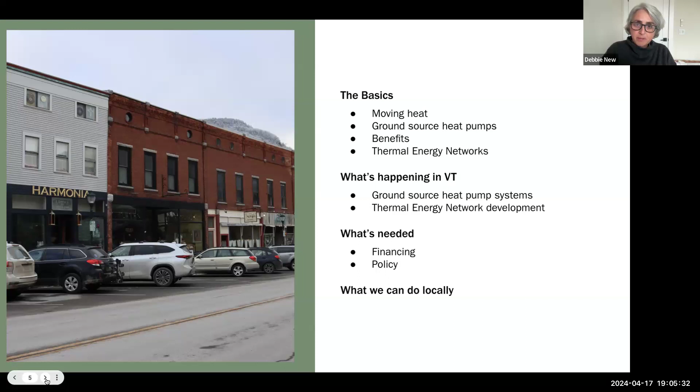I'm sure I don't need to tell you that in Vermont especially, heat is a precious resource. We spend a lot of time, energy, and money trying to make heat, move heat, and save as much heat as we can. We're using a lot of fossil fuels in order to create our heat. We're having to rely on that a lot, which means we're spending a lot, we're importing that fuel, and that means our energy dollars are going out of our communities and out of our state.

But there is a way to maximize heat that we already have here, and the way we do that is with ground source heat pumps. You may already be familiar with an air source heat pump, and you may already know about a ground source heat pump, sometimes also called a water source heat pump. These are much like air source heat pumps in that they compress or reject temperature in order to heat and cool inside spaces. But ground source heat pumps use water instead of air, and they also use more moderate temperatures, which is important in a couple ways we'll get into.

So if you have a ground source heat pump in your home, for example, you can see the gray box in the basement is the heat pump. It looks a lot like a boiler. That heat pump pulls temperature in from outside the building, compresses it, and delivers it through ducts or some other form through the building to make you warm in the winter, and also can remove the heat and get that out of the building to keep you more comfortable.

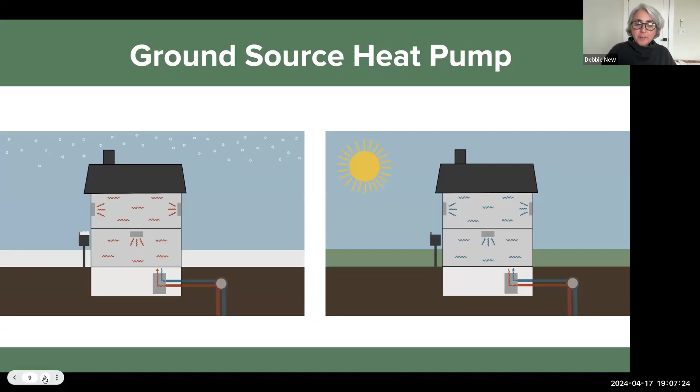In the summer, the process reverses. So the heat pump removes heat from the building, sending it outside into the ground, and that allows the space inside to become cooler, bringing in that coolness to keep you comfortable. Now, this energy comes mainly from the sun, and in this case, from underground, and a lot of people refer to this as geothermal heating and cooling - which doesn't mean it's about the hot rocks and what you find in Iceland or geysers or that kind of thing coming up from the Earth's core.

This is about the energy of the sun being absorbed by the Earth that holds it, acting like a solar battery. So we can drill into the Earth and create a borehole like this with vertical pipes filled with water at about the depth of a water well, where the Earth's temperature in Vermont is pretty much a constant 50 degrees - that's the more moderate temperature I was talking about earlier. So that's how the energy gets into the house through the vertical pipe, horizontal pipe, to the ground source heat pump.

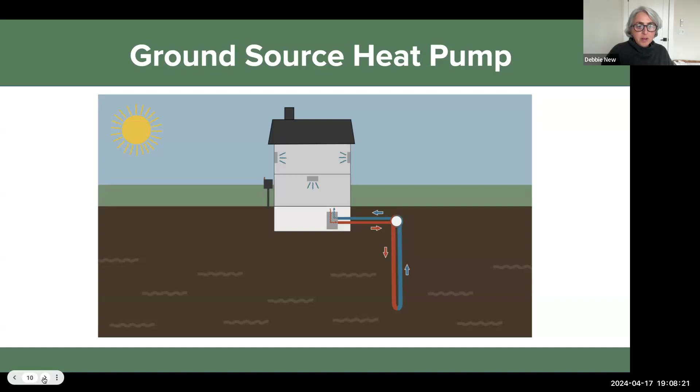So this system works really well for an individual, a home, or a municipal building, a larger building, particularly because they are so low maintenance and efficient. They can actually lower costs for energy use in our municipal buildings and other large individual buildings.

They also work really well when they're networked together. The important thing here is that we can start small by just linking a couple of buildings and then expand it over time across a neighborhood, across our community, to reach different buildings and become a network. This makes the system even more efficient because buildings need different heating and cooling at different times, so instead of wasting that energy, we can share it and balance it between buildings.

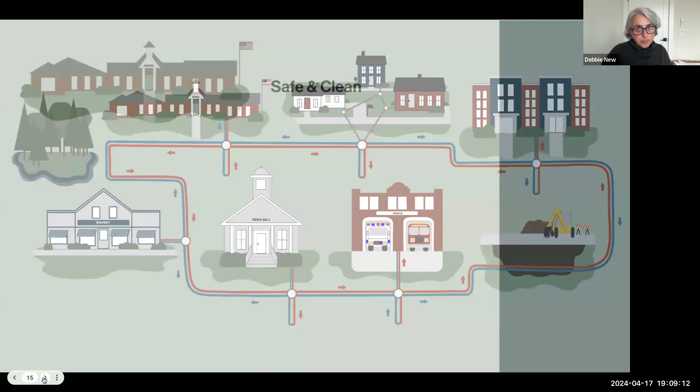I just want to talk through some of the benefits of these systems pretty quickly, and I bet you can guess at many of them. For me, one of the important ones is that it's safe and clean because it's mainly water inside the pipes instead of fossil fuels, which means there's no risk of explosions or toxic leaks and no emissions. They're also affordable and reliable because once installed, customer bills can be low and predictable year-round. They're healthy because nothing is burned to create the heat, so indoor air is safer to breathe. They're flexible, which I think is a really important component in terms of our Vermont landscape and the local character of our communities.

These systems are underground and inside buildings, so they're not visible, they're not an aesthetic problem, and our communities can look exactly the way we want them to.

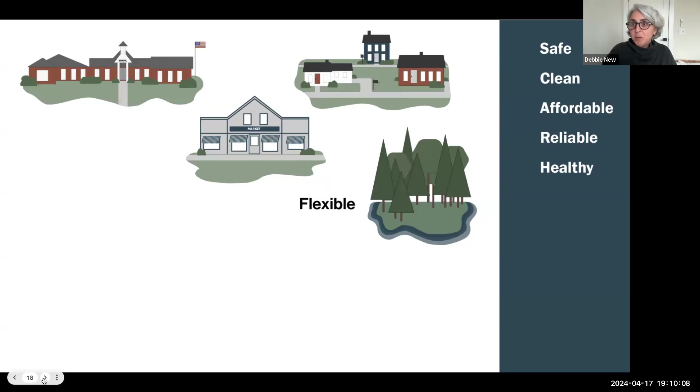They're also resilient and secure because the pipes are underground and the components are inside. They're less vulnerable to disruption and extreme weather events, particularly in Vermont where flooding is much more of an issue.

They can also be equitable because they're not about one house or one building at a time being able to access and afford the system. They're a community scale system that people can tap into, but that is provided across a neighborhood, so it can be available to a lot of people and a lot of buildings at once.

They can also be part of a just transition because oil and propane and gas workers are essentially plumbers and pipe fitters, and those are the skills that are needed to install and maintain this equipment. So it would take very little training for our Vermont oil and propane delivery companies to retrain their workers and move into this business instead of going out of business.

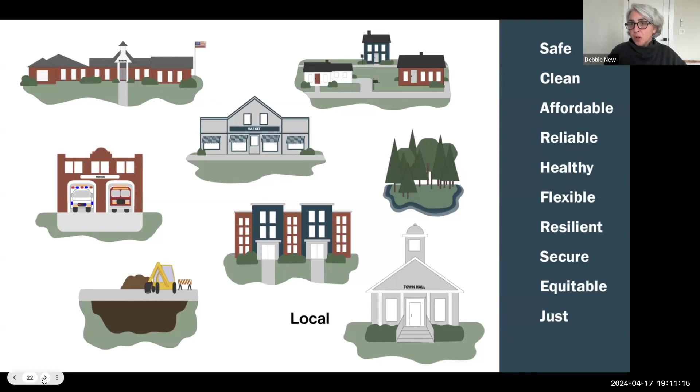The other really important thing is that this is local. In other words, the heat is right here. We're using it here. We're investing in our own communities, and we can control these systems locally, whether it's a municipality or a different kind of ownership model. So that's a pretty long list of benefits.

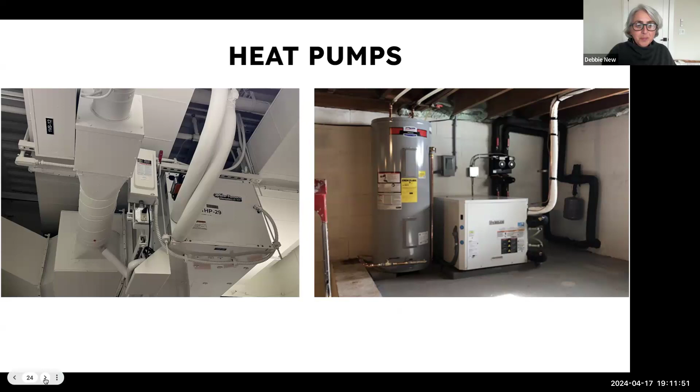So what does this look like? Well, these are a couple different heat pumps. On the left, that's a heat pump unit that is up in the ceiling in a more industrial setting in Burlington at Hula on Lake Champlain. And on the right, a heat pump in an individual building or home looks a lot like a furnace. It's that box. There are also the pipes, plastic pipes of varying diameters, and whether they're narrow or larger, it all goes underground and out of sight.

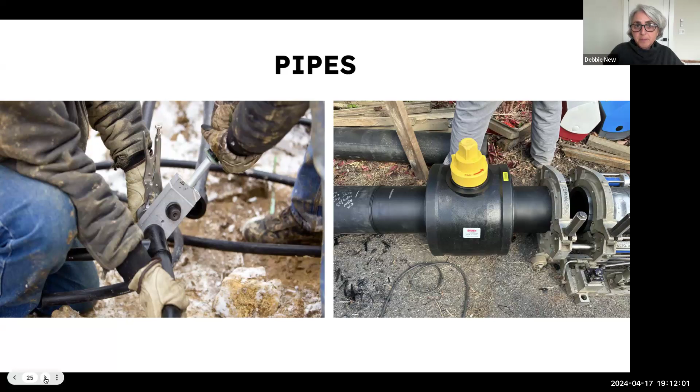So one place this technology is already working in Vermont is in Burlington at Champlain College. And if you think of a college campus kind of like a community where there are different buildings that serve different purposes, used at different times, you can imagine how a network would be very efficient.

At Champlain College, they have new construction where they've installed this. They also have historic buildings that have been retrofit to be dorms and offices that are also using ground source heat pumps. And they've connected the buildings via horizontal pipes underground, kind of like a gas pipe would connect buildings. And those buildings at Champlain College are sharing heating and cooling, and they're working on expanding the system to cover their whole campus.

As I mentioned before, Hula on Lake Champlain is another Burlington example of this technology working. They also have solar and other technologies they've integrated into the system. That is working really well, and it hasn't been operating as long as Champlain, but it is still working very well at Hula.

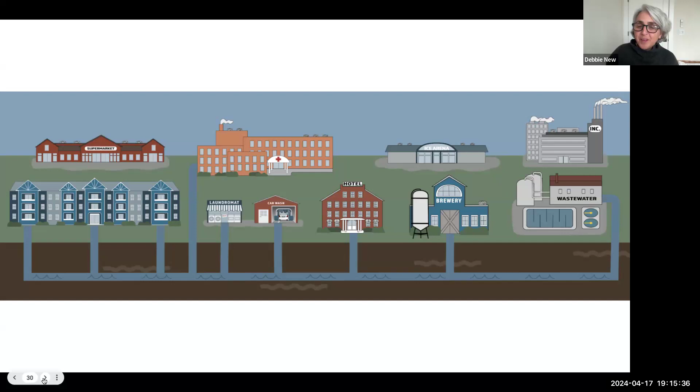You can also reject heat into that wastewater, and it gets carried away so your buildings can be cooled in the summer. So wastewater is one way we can access temperatures that we are already creating and currently discarding. The other way we can access temperature is through waste heat.

If you think about a supermarket or an ice arena, and even your refrigerator at home, to cool things down, we have to take heat out of them. So whether it's your refrigerator, a grocery store, or an ice arena, in order to provide that refrigeration, heat has to be pulled out of the building. Right now, most of that is being vented through cooling towers or fans you can see on top of these buildings. It's not just refrigeration, but hospitals, hotels, breweries.

There's waste heat coming out of a lot of our big buildings that we can capture and send back into buildings through water and pipes.

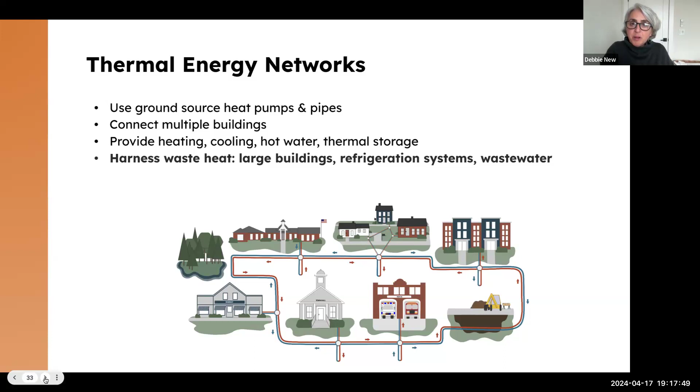So thermal energy networks, to sum up, use ground source heat pumps and pipes to connect multiple buildings to provide heating, cooling, and domestic hot water, and also thermal storage, because the system holds heat in the ground and also balances it between buildings at different times. Thermal energy networks also harness waste heat from large buildings, refrigeration systems, and from wastewater.

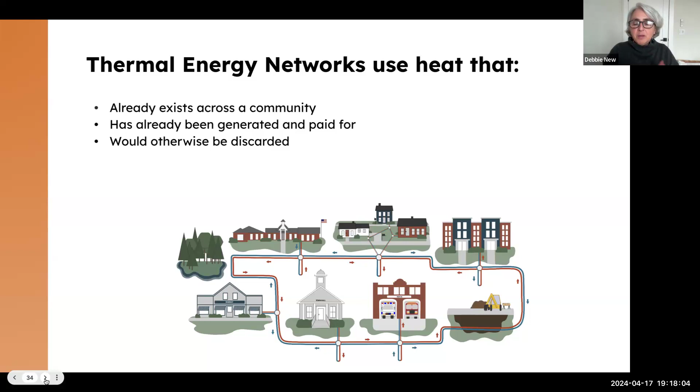In other words, thermal energy networks use heat that already exists across a community, has already been generated and paid for, and would otherwise be discarded.

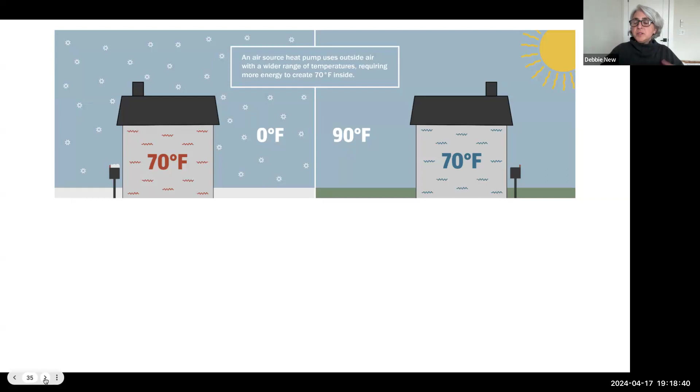I want to take a minute to talk about the moderate temperatures that ground source heat pumps use and why that matters in Vermont. If you think about an air source heat pump, there are times of year when it pulls from outside air at about 0 or below and has to get to about 70 degrees inside. In the summer, the outside air could be 90 or more, and the heat pump has to work harder to maintain that 70 degrees inside. So an air source heat pump uses more electricity and has to work harder to provide that heating and cooling.

Whereas with a ground source heat pump, the ground underneath is a moderate and constant temperature, about 50 degrees year round in Vermont, but also waste heat and temperature from wastewater could be about 50 degrees or more. Those more moderate, constant temperatures mean ground source heat pumps use less electricity and don't have to work as hard, which means the components are longer lasting, customer electric bills are lower, and we don't need as much electric grid infrastructure. So less investment in wires and poles, but we're finding heat in other places and adding another way to heat and cool our building rather than just through electricity.

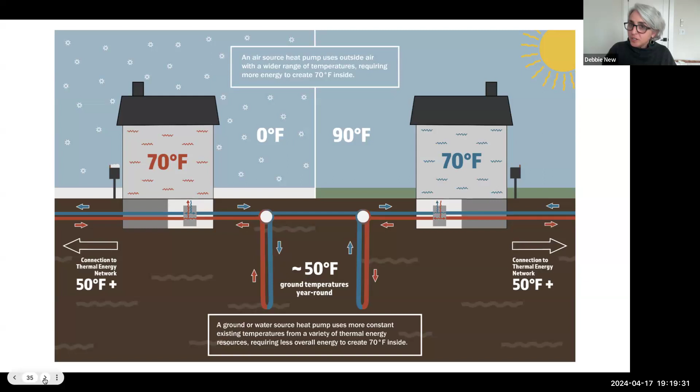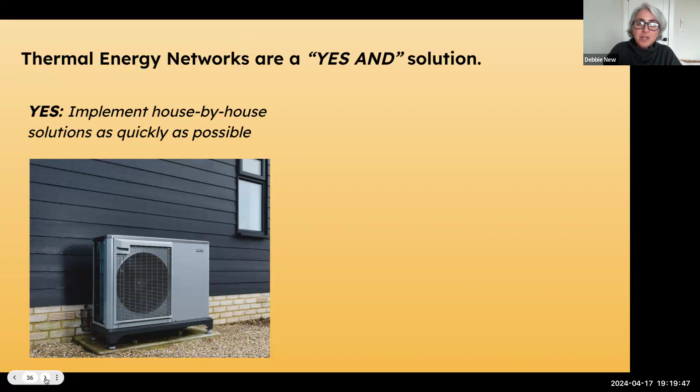So importantly, thermal energy networks are a yes and solution. By that, I mean that we do need air source heat pumps in most of our Vermont buildings, many of them, and we need to implement those house by house solutions as quickly as possible.

Part of it is to add community scale solutions like ground source heat pumps where they're most cost effective. So in our town centers where there's density already and we need to add more density because we need housing, or we're expanding a water or wastewater system, or doing other things to meet our community goals, this kind of project can fit in right alongside and even benefit those goals.

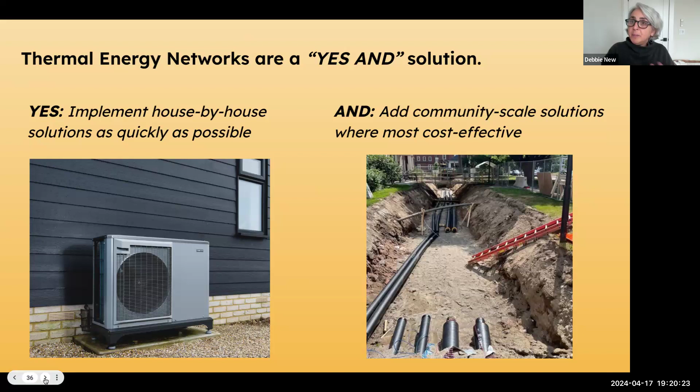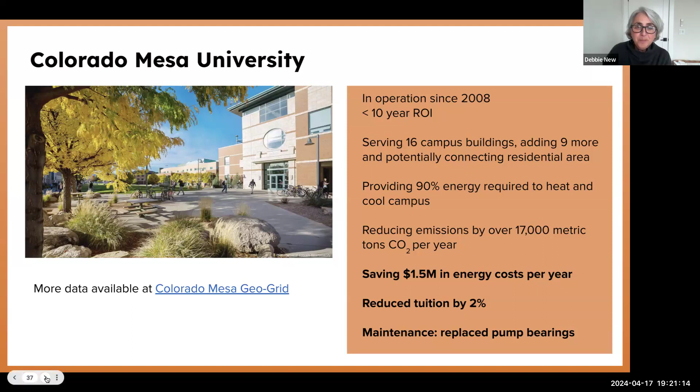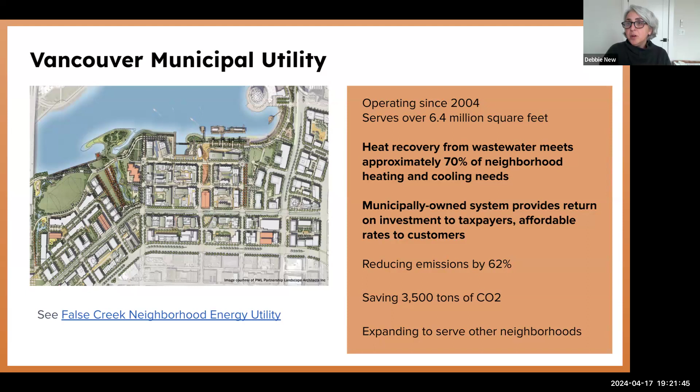So there are a couple of things we need to do in Vermont to make thermal energy networks possible. One is to figure out how we're going to finance them. There are a lot of unprecedented opportunities, particularly from the federal government through the Inflation Reduction Act and other programs. The IRA in particular lets us start at 30% off these systems in tax incentives. If you're a municipality or a nonprofit, you can receive that money directly as a check from the IRS, but it's also very beneficial to businesses and others. So that can go a long way toward making the upfront cost affordable for us.

The other opportunities are in our state and locally. We can optimize the utility model—in other words, set up a thermal energy utility locally or regionally to access upfront capital and then recover those costs over a longer period through rates to customers. That makes it affordable to customers and doable in terms of affording the cost of installing the infrastructure in the first place. The utility model is very familiar to municipalities that already operate water and wastewater systems.

We can also engage businesses, because they generate and waste a lot of heat, and they also have heating and cooling needs, so this matters to them. Public-private partnerships are an important vehicle, and our local banking community is another place we can turn to for support of these community scale projects. We can also leverage other kinds of federal funding. The Vermont Bond Bank, VEDA, and our state treasurer are all working hard on pulling down those federal dollars and figuring out how they'll be distributed across the state.

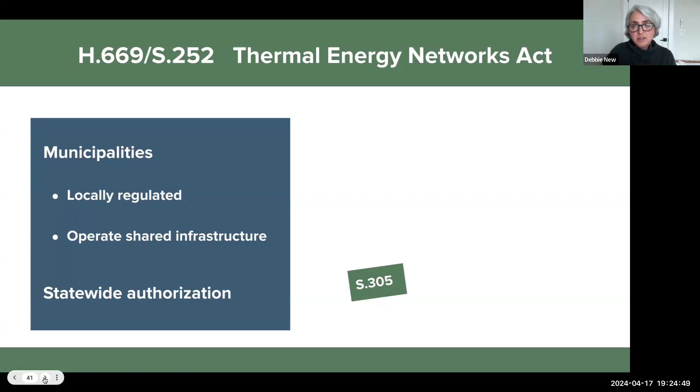In particular, it allows municipalities to go ahead and do this because they're already locally regulated through local government, and they already operate shared infrastructure like water and wastewater systems, moving water through pipes. With a thermal energy network, we're moving heat through water, through pipes—so it's really pretty much the same thing. This gives statewide authorization for municipalities to implement the solution, regardless of what their town charter says. I like to think of it as a green light for us in Vermont to go ahead and do this through S305, and we're hoping that by the end of the session it will pass and we'll be good to go.

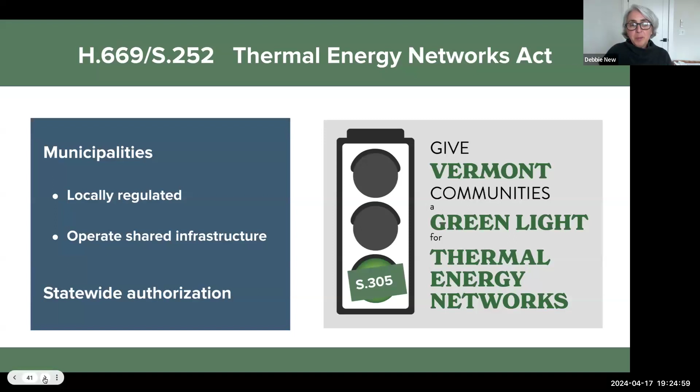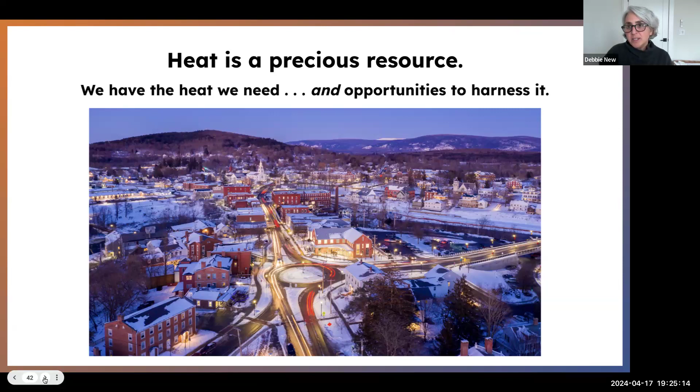So I want to return to where we started, which is the obvious thing that heat is a precious resource, but also that we have the heat we need and we have opportunities to harness it. I made a couple screenshots of Bristol so we could talk about that, but for now I'm going to stop sharing and I would love to hear what your questions are, what you think about this, and then we could talk specifics about what's already happening in Bristol and how this might fit in with what you're doing, and how we might do that together.

Debbie, that was really informative. Thank you for that. You talked about the vertical wells. Do you see, I've heard of trenches, 5 or 6 feet deep, going horizontally. Do you see those as practical for this?

Yes, if we have the open space to install those. So what's being said, which I didn't describe in the presentation, is that you can go vertically to access the ground temperature. You can also put coils of pipe, like if you took a slinky and stretched it out. In fact, these systems are called slinkies, and you can bury that about 6 feet down if you have an open field or something like that. That's a way to harness the ground temperature. It doesn't have to be drilled vertical boreholes, just trenching and pipes underground. You can either do the slinky method or lay pipes next to each other back and forth underground, and that can work as well, but it depends on your space.